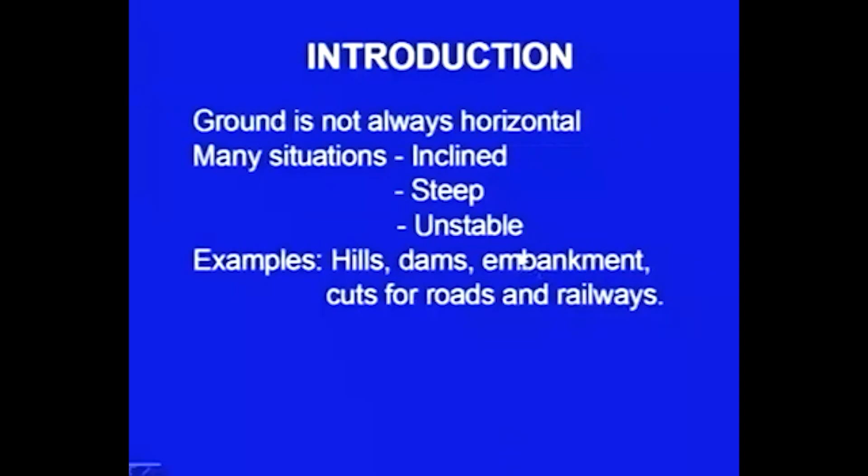We start with the classification. So, as far as the classification is concerned, all the slopes can be categorized into two major categories. One belonging to mining engineering and second one is civil engineering. We shall be concentrating more on civil engineering aspects, but to have some idea to differentiate between mining engineering slopes and civil engineering slopes, some discussion I am going to give here.

You might have seen in case of the mines, there are open cast mines. What we do there is we extract the ore. The ore is extracted by excavating the ground. So, ground is required to have certain slopes there, and you will watch that you can have very steep slopes. And another thing about the mining engineering slopes is they are very large in extent. So, there is a basic difference.

The basic difference between civil engineering and mining engineering slopes is that here our purpose is not to make the slope stable as such. We are extracting the ore and we shall be keeping the slope stable for that much time for which we will be extracting the ore. So, our main purpose is to extract the ore. It's not our purpose that we keep it safe for certain structures. For example, in case of civil engineering structures, we have to keep the slope stable for a very long period.

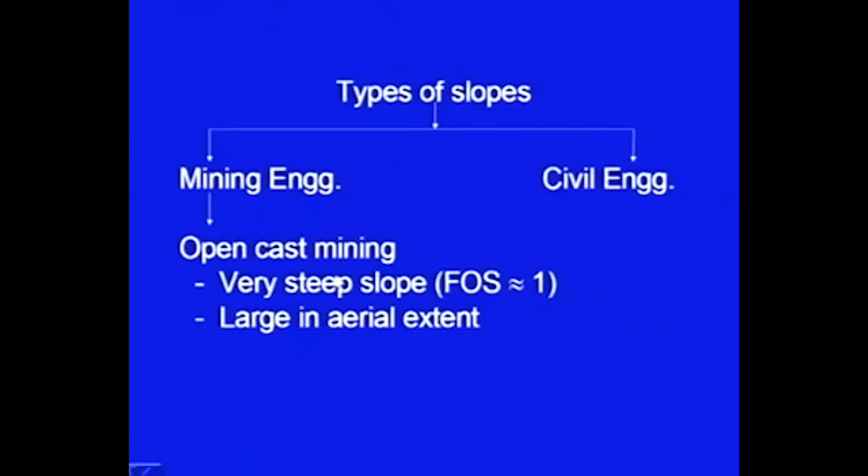So, this is a mining slope, and you can see the area, because you have to extract a large amount of the ore, the area generally is very large, whereas in case of civil engineering structures the area generally is small. Coming to civil engineering slopes, as I told you, the margin we keep very high. So, factor of safety is 1.4 to about 2.0. We shall be discussing what factor of safety is. Presently, you can think that it is a sort of confidence, how much margin for safety we are taking.

Now, civil engineering slopes I am dividing further into three categories. First is based on process of development, second one is based on composition, and third one is based on its extent. The first one is based on process of development. This means how the slope has come into existence, whether it was a man-made structure or a natural kind of structure. So, therefore, again it is divided into two categories.

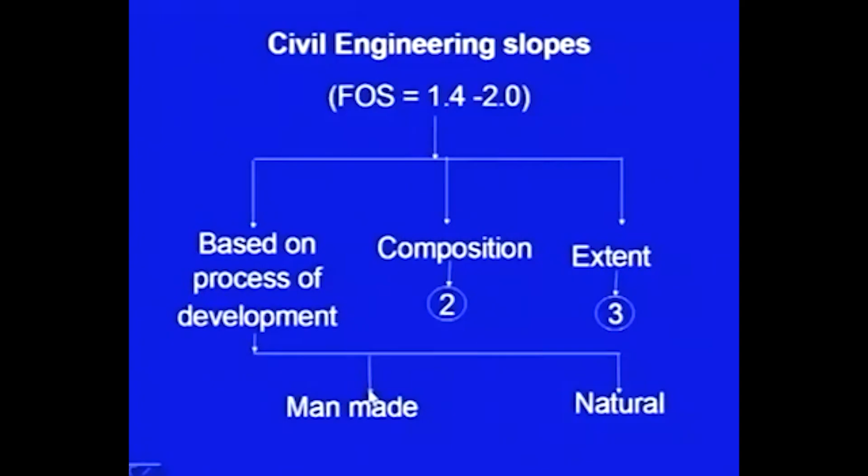Here are some of the examples of man-made slopes and natural slopes. First one is, to give you the idea, cuttings and embankments for highways and railroads. Cuttings means you are cutting the soil.

You might have seen for highways, for example national highways, which are very important highways, and for railroads, when they pass through an area which is near to a river, the highway is kept at a little bit higher level. The idea is we try to keep it above high flood level, so that during the floods also these highways are not blocked.

So, to do that, we have to make some sort of embankments, and on that embankment the highway is placed. This embankment is constructed of soils or rocks or both of them, and the stability of this embankment is very important. So, there are the embankments.

Secondly, cuttings are there wherever the ground is undulating and the road or railway track is passing through that. In fact, in case of the railway tracks, you have to have a very gentle gradient. You cannot have very steep gradients on the railway tracks. So, where the ground is uneven, you have to make the track on a smooth surface.

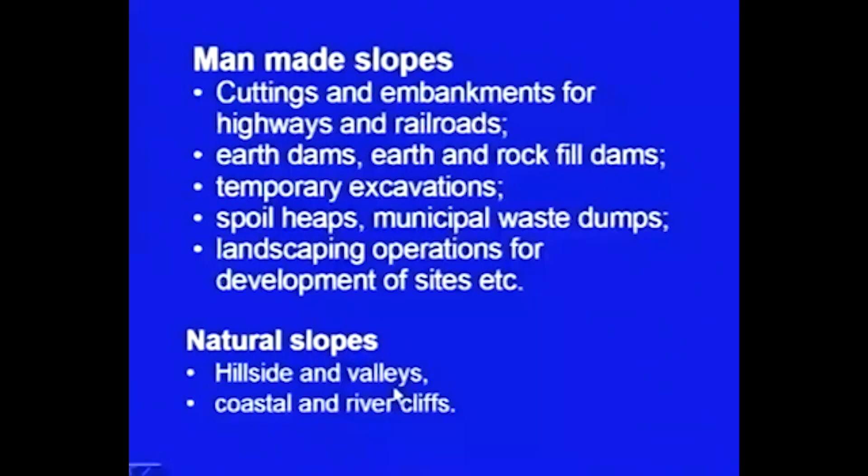Here are some examples I am giving. For example, this is a road cut in hillside. This was the natural ground. You can see I have drawn a small dotted black line. This was the natural ground level. It was going like this. So, in itself what was the stability of this hill slope, that is another question. But above that, now we have done this cutting.

We have constructed a road here, and now you can see we have removed this particular material from the side. So, actually this soil mass or the rock mass was being supported by the material which we have excavated. So, there will be a tendency of this particular geological media, whether it is a soil or rock, to try to slide to this direction because of the gravity.

There you can see some measures have been taken here. A retaining wall has been constructed. Retaining wall is one of the ways using which the slopes are stabilized. So, the idea is that here it is now left unsupported. It was being supported by the soil mass here, now it is unsupported. So, it will try to move here. So, this particular problem you have to analyze using mechanics of slope stability.

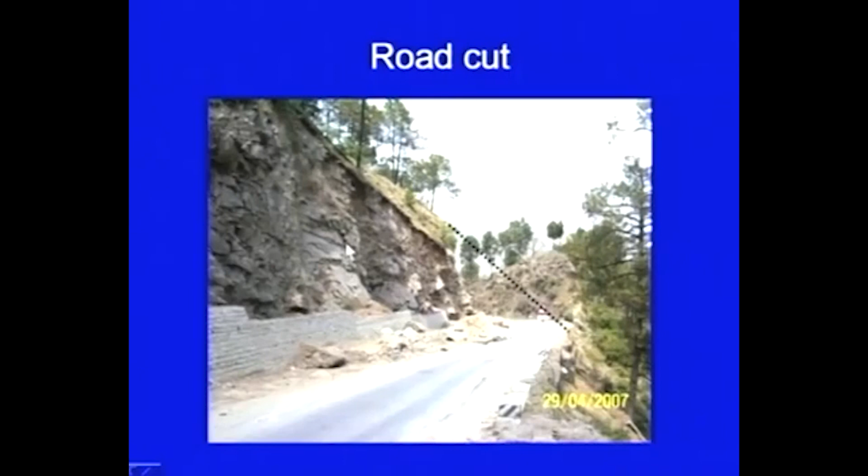Here is another example of a man-made structure. It is a dam here, you can see it. This is the downstream side of an earth and rock fill dam. Upstream side is above that. Water will be stored on the upstream side. A reservoir will be formed there, and water will be exerting pressure on this dam. It will be seeping through it, and the seepage pressure will also be acting on the dam body, inside the dam body. So, here the stability of this particular structure is our concern.

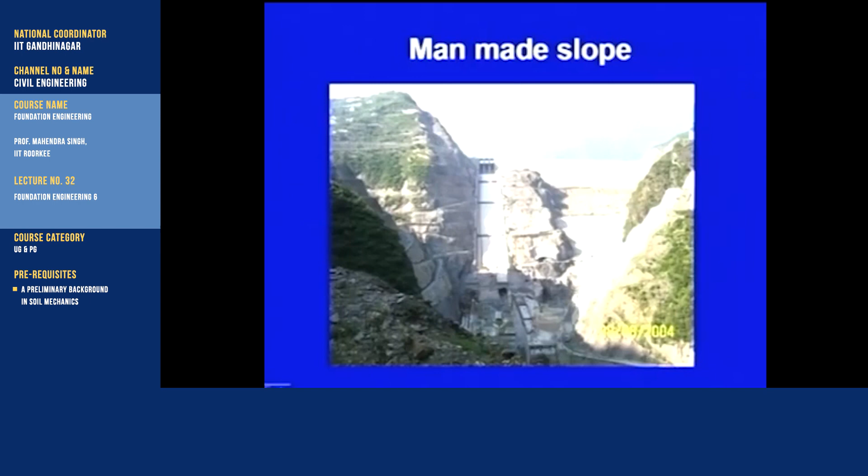Secondly, it is not only the man-made structure, but you can see here these are the steep banks which have been cut. Again, they are man-made plus natural. So, you can have a problem which is having man-made plus natural slopes both. So, here you can see the natural slopes are there, and there are very steep cuts in the rock mass here, steep cut on this side. So, stability, whether it is stable or not, whether it is failing, what is the margin of safety, that is the point of concern.

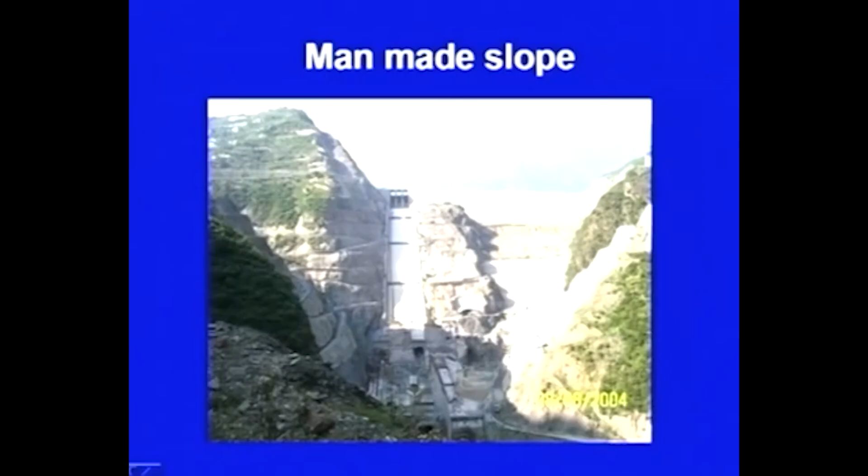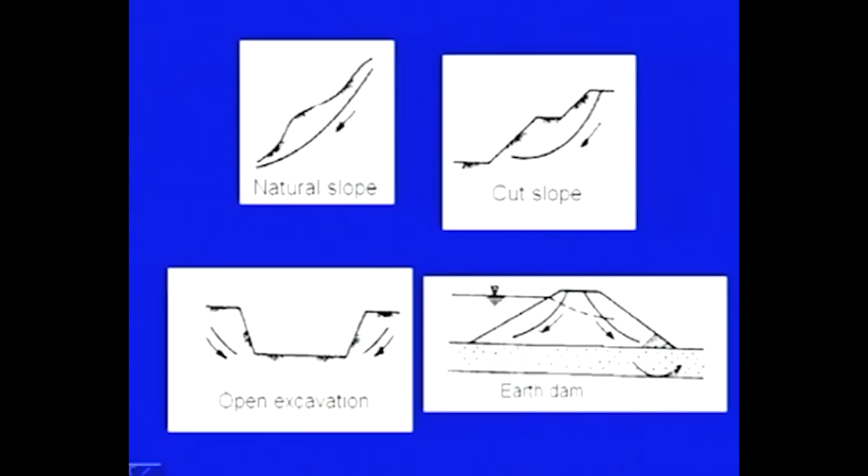So that was the first category of the slopes. Now, the second category of civil engineering slopes is based on composition, and here I divide them into three parts. There may be a slope composed of soils only, there may be a slope composed of rocks only, this particular course will be mainly concerned with soils, or there can be a combination of both. For example, in case of landslide problems, it is not enough that you know soil mechanics, you have to know the principles of rock engineering also.

Coming to soil slopes, where we are concentrating more, the material can be only clay. For example, when we construct slopes in case of embankments etc., you can have only clay. The section which we are analyzing may be only clay, or it may be sand, or in general for embankments it will be a combined situation. So from theoretical analysis point of view, we have to know each of them, and practically for embankments most of the time you will be having a combination.

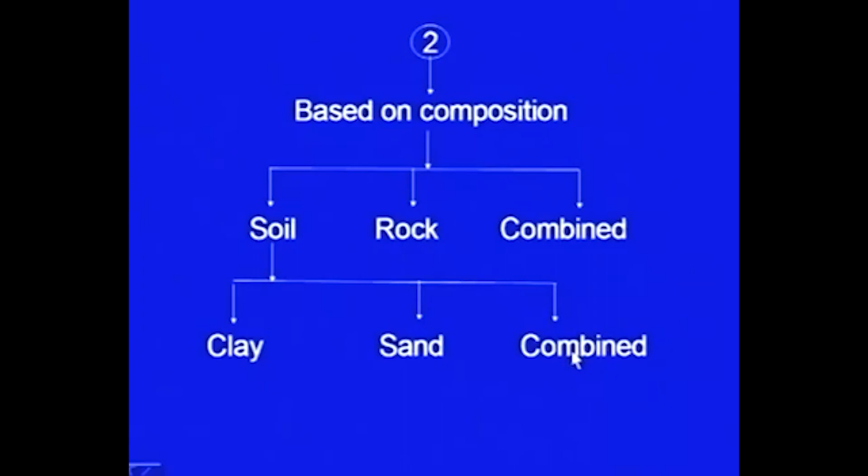The third category of classification is extent. Based on extent, they are divided into two categories: infinite slopes, meaning the extent is very large, and finite slopes, meaning the extent is small. So infinite slopes are, for example, the hills, which are having very large extent, so we can consider them to be infinite for theoretical analysis. Examples like embankments have smaller extent, and we will be considering them as finite slopes.

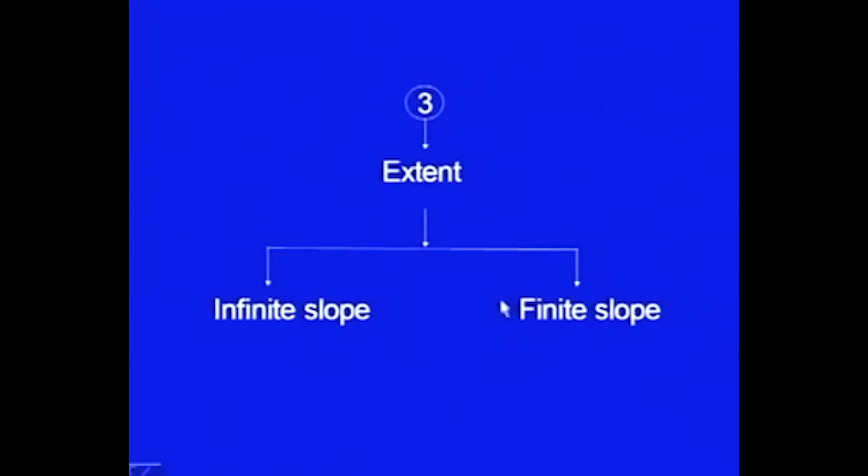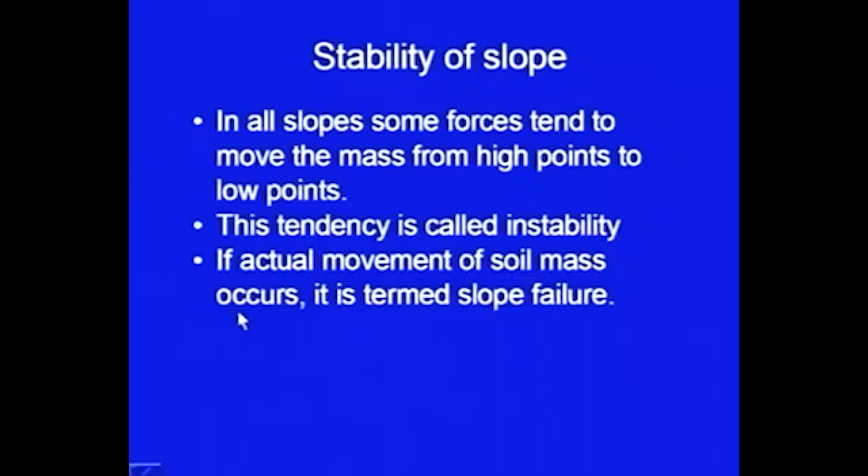Now, after having the idea what is the slope and what are the different kinds and classifications, let me come to the point of what exactly we are going to do, what this stability of slope term means. Now, in all slopes, some forces tend to move the mass from high point to low point. It is very natural, as a student of mechanics you know, because of gravity, if there is a soil mass at a higher level and another at a lower level, then there are some actuating forces. Because of gravity, there will be a component of gravity forces that will try to move the mass from the higher points to the lower points. This tendency is called instability. So it is trying to be unstable, and if actual movement of the soil mass occurs, then this is called slope failure.

Let me try to explain the stability, how we look at stability. It is a simple example, not from the slopes, but to make it clear, I have taken a simple mechanics problem which you have solved in your intermediate classes. It is an inclined surface having some roughness, represented by friction coefficient mu.

There is a block kept over this surface. This inclined surface makes some inclination psi with the horizontal, and the interface between the block and this plane has no cohesion, only a frictional component, that is mu. You have solved these kinds of problems in your intermediate classes.

The weight of the body is known, and it acts in the downward direction. I can resolve this weight into two components: one acting normal to the plane, and the second acting tangential to the plane. If this angle is psi, the normal component comes out to be W cos psi, and the tangential component comes out to be W sin psi.

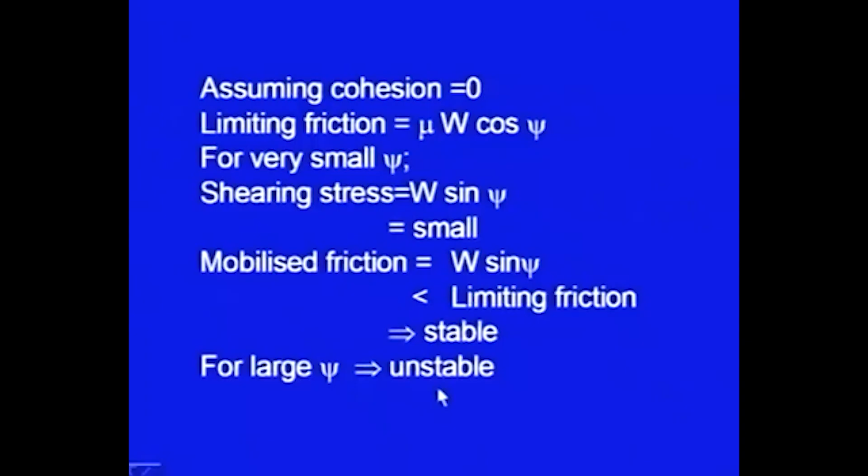Let me finally summarize the conclusion. If psi is small, it will be stable, because the mobilized friction equals the actuating force. As you increase the angle psi, the actuating destabilizing force goes on increasing, and the mobilized friction also goes on increasing.

At a certain value of psi, W sin psi becomes equal to the limiting value of mobilized friction, mu into R. Beyond that, if the slope is steeper, W sin psi becomes very large and the block will slide. This is the basic principle used in stability analysis: we compute the mobilized value of shearing resistance, the limiting value of shearing resistance, and based on that find the margin of safety.

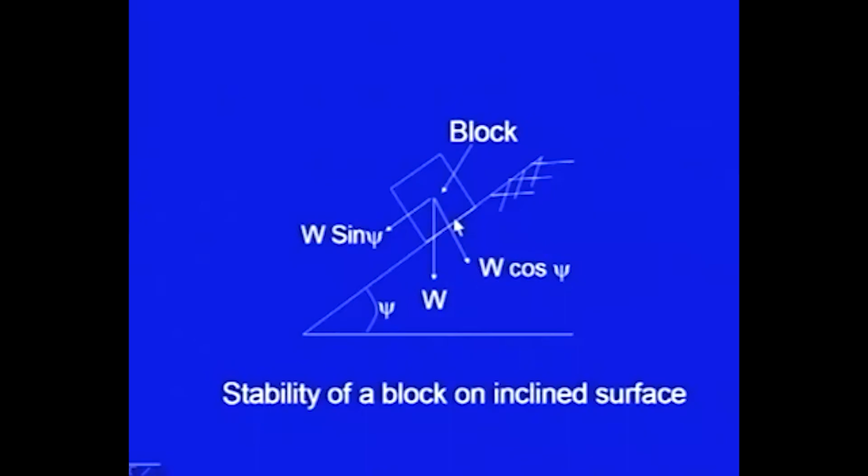There are certain important factors which govern this instability. Let me discuss them one by one. These factors are gravitational force. You saw just now that W was coming into picture, W sin psi was coming into picture, so this was causing instability. The gravitational force is going to cause instability. Its one component is going to cause instability, another component is going to enhance the stability. So we have to see that relationship.

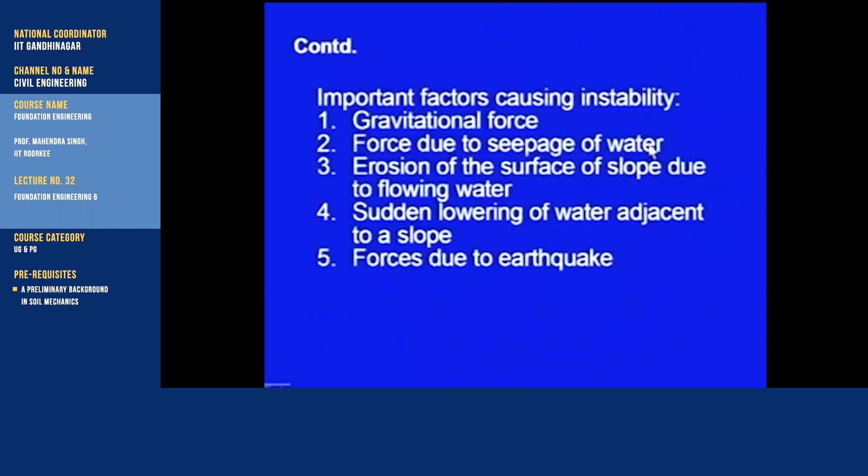Then there are other things I did not discuss. Force due to seepage of water. If the water is seeping through the soil mass, then there are additional forces which will come into picture. Then there may be erosion of the surface of slope due to flowing water. The erosion of the surface will have effect on the gravitational forces. It can reduce the gravitational force, but the water itself can have seeping effect. So these are the things which have to be considered. Then sudden lowering of water adjacent to a slope can cause instability, and also there are forces due to earthquake which can cause instability.

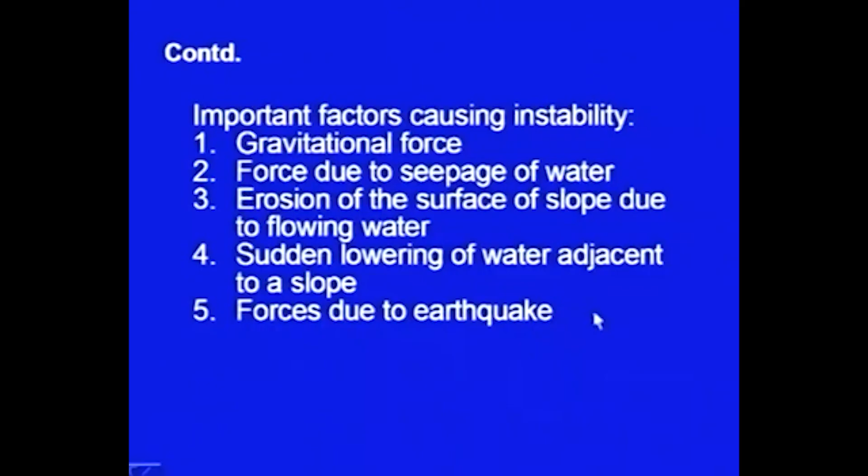This is the first force, gravitational force. Here I have taken an example of an infinite slope. It is a hard stratum, firm stratum available at certain depth. It happens in case of the infinite slopes. In case of the hills, generally the firm stratum will be available at certain depth. And here it is the ground surface, and this entire mass, if you look, the failure generally has been observed that it occurs like this.

So this particular entire mass is trying to slide over this hard stratum. It is a problem similar to what I discussed, a block. You can consider this mass to be a block, and the weight of this block, the component of weight of this block, this component is trying to destabilize it. So this is the gravitational force, how the gravitational force comes into picture. This is the importance of that.

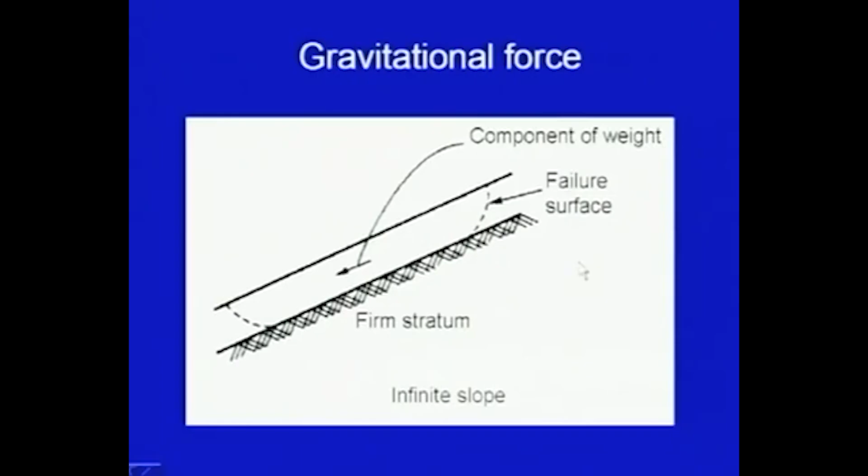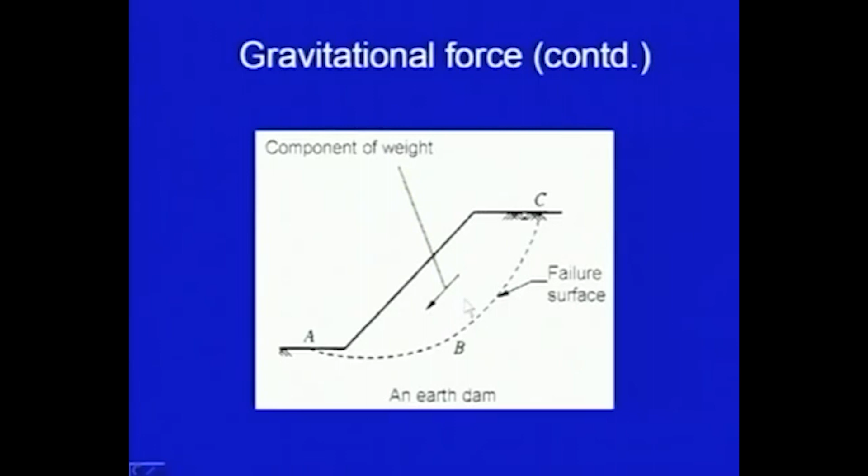Now here is another example of the gravitational force. Here I am taking an earth dam, and its section is drawn here. In this man-made structure, the failure surface generally has been observed to be a curved surface. Most of the time it is taken as a circle, and this mass tries to slip in this direction. So again if you look at the weight of this particular body, the weight will be acting in the downward direction. One component is acting parallel to this failure surface, another component will be acting perpendicular to the failure surface. So as a whole, if we take this body, you can see the component of weight is trying to destabilize, trying to create instability in the slope.

These are the examples. This is the example of seepage force. Here it is a low lying area, and groundwater table is here. This is the ground surface, and seepage is taking place. So when the water table comes, the groundwater table touches the ground here. So this entire area is completely saturated, and seepage is taking place in this direction, and seepage is almost parallel to the slope. So these situations have to be analyzed in a different manner, and here this seepage joins the water table. So we will be considering these details, how to take into account the seepage forces.

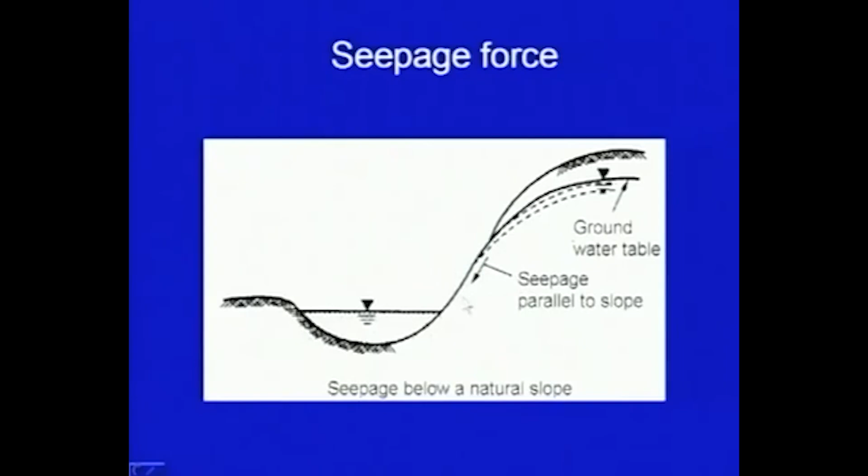Here is a problem which is quite common in case of dams, earthen dams. It is called the sudden drawdown problem. There was an embankment here, and there was this water table. This water table was there for a long period, so the system was in equilibrium, and seepage was taking place from this side to the downstream side. You can draw the flow net and get an idea of the seepage.

Now, all of a sudden there is a lowering of water level, so from here the water level goes down to this place. What happens to this saturated soil mass which was in equilibrium, being exerted force due to seepage and force due to water? Water was providing a stabilizing force over this soil mass, and it was under equilibrium. All of a sudden this pressure due to water has been removed, but the soil is completely saturated, water is still present there. So there is a flow which starts from the soil mass towards this side, and instability is created because of sudden lowering of water level. This is called the sudden drawdown condition.

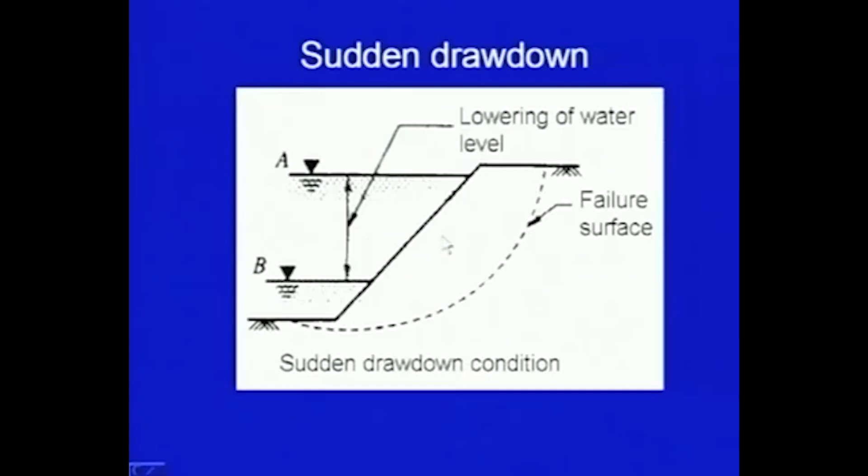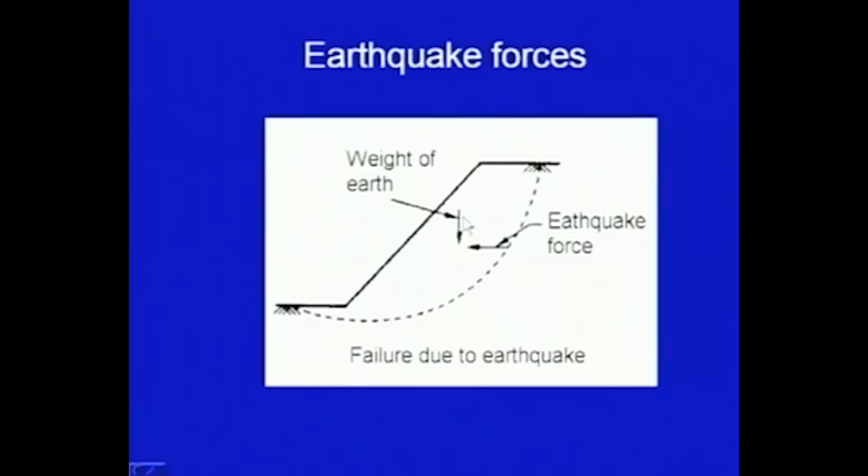Earthquake forces cause severe shaking of the soil mass. Here is an embankment, its weight is acting in this direction, and the earthquake forces cause shaking. The earthquake forces can be resolved into two components: a horizontal component and a vertical component. When there is acceleration in a given direction, the force due to earthquake acts on this soil body in that direction. What this does is decrease the effect of normal stress, decrease the stabilizing forces, and in other words, increase instability.

Now let me come to the basic mechanism. We have discussed what a stability problem is. The actuating forces induce shearing stresses throughout the soil mass. There are certain actuating forces, the most common being gravity, and those actuating forces induce shearing stresses throughout the soil mass. Now we will be talking in terms of shearing stresses, there is some stress which is being applied.

Unless the shearing resistance on every possible failure surface within the soil mass is larger than the shearing stress, failure will occur in the form of mass movement of soil along a slip surface. So the actuating forces create shear stresses, and these shear stresses have to be resisted by the shearing strength of the material. There can be an infinite number of possible potential failure surfaces. On all these potential failure surfaces, if the slope is stable, that means the resistance offered by the soil in terms of shear strength is larger than the actuating shearing stresses.

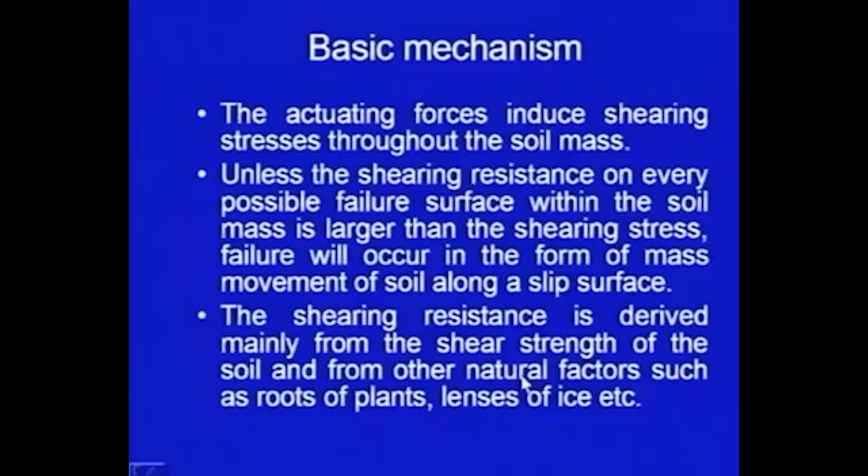This shearing resistance is derived mainly from the shear strength of the soil, which resists the applied shear stresses. Some help is also available from other natural factors, for example roots of plants or lenses of ice. In fact, plantation of roots is a very effective measure in case of natural slopes, because the roots of plants add to the shear strength of the soil mass and oppose the actuating shearing stresses. So the basic mechanism is this: there are actuating shear stresses, and those actuating shear stresses have to be resisted by certain resistance.

We shall be using the limit equilibrium method in this analysis in this course, and this method assumes that failure is on the verge of occurring along an assumed or known failure surface. As mentioned, there are infinite possible potential failure surfaces, so in this method we assume a particular failure surface. It may be a planar surface or a curvilinear surface. Then, second, the shearing resistance required to maintain equilibrium is compared with the available shearing strength of the soil.

So in this method, first we take a failure surface, and on that failure surface we find out the shearing stresses. Once the shearing stresses are known, we can find out the required shearing strength, which will be equal to the applied shearing stresses. This required shearing strength is then compared with the available shearing strength, meaning the maximum value that particular soil mass can offer.

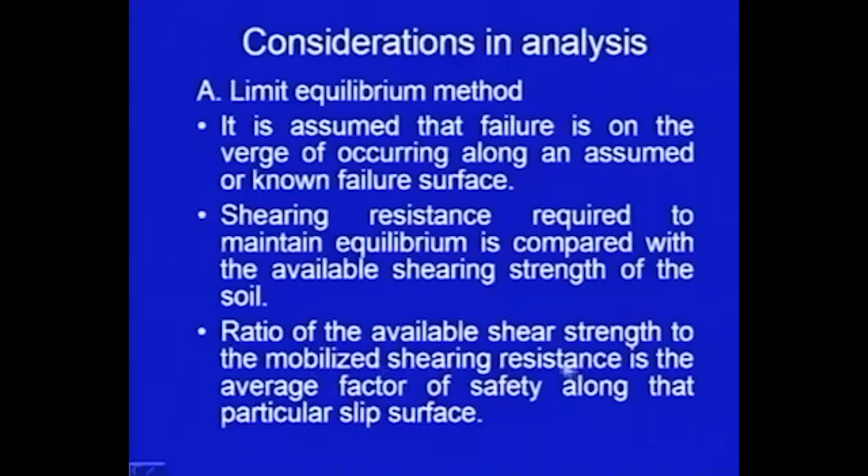Coming to the shear strength parameters, all the stability analysis you are going to do now will be very sensitive to these parameters. These parameters are very important. There are two shear strength parameters which we use. These you know: the first is called cohesion and the second one is called angle of internal friction, or angle of shearing resistance. How we get it, you have already studied in your soil mechanics course.

We do some triaxial tests. From the triaxial test we get data between confining stress and major principal stress at failure. From those data we plot the Mohr circles. So these are the Mohr circles. From these Mohr circles we then plot a common tangent. This represents the failure envelope, and the significance of this failure envelope is it tells you the relationship between the normal stress and the shear strength at failure. So for any given normal stress you can calculate the shear strength.

Here we are using a straight line variation, so it will be an equation between c dash and phi dash. So y is equal to mx plus c, that is the form of equation. So tau will be equal to m becomes tan phi into x becomes sigma, and c dash is the intercept.

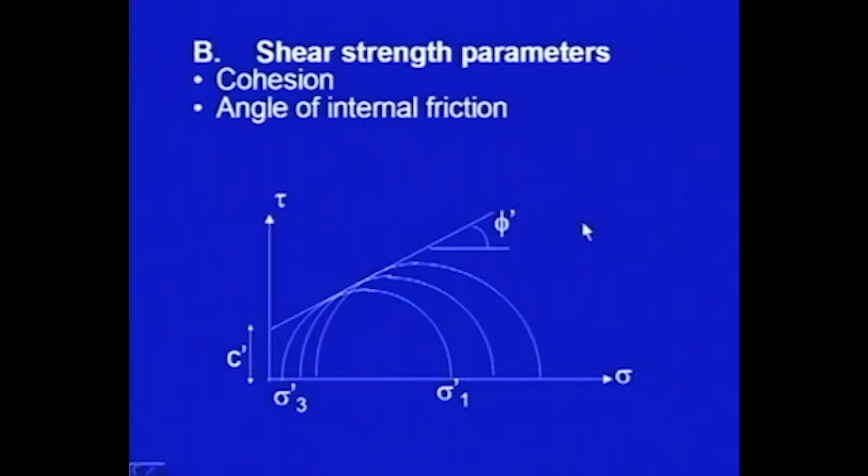They are very important: cohesion and angle of internal friction. These are the important parameters, and some discussion about these parameters is necessary. First point about these parameters is it is not easy to determine them, though we take it for granted. Sometimes we do the test and we take the c and phi values, but it is very difficult to determine these parameters in the sense that the representative value, what is that value which is actually applicable in the field, it is difficult. You have to decide whether to use undrained or drained shear strength.

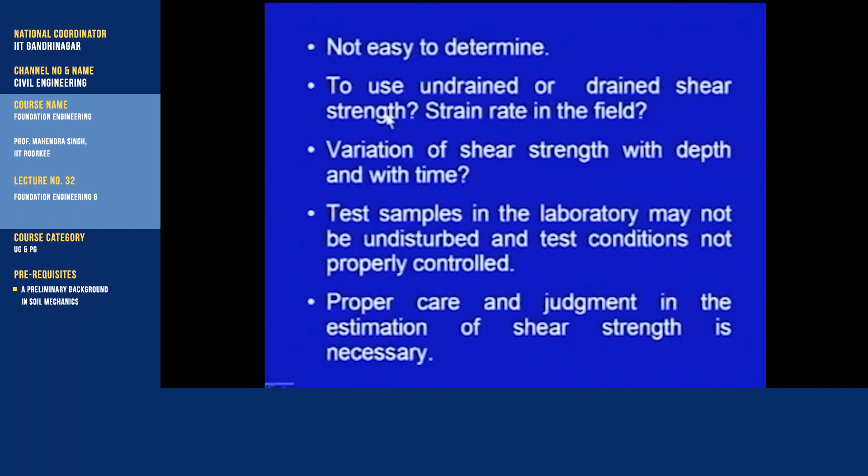We will be discussing this point later on also. Undrained and drained conditions depend on the strain rate, the rate of strain at which failure occurs, and what is the permeability of the soil. If the permeability is very large, for example if it is a sandy soil, you can treat it to be drained, you can use the drained shear strength parameters. But if it is clay soil, or even silty soil, then the rate of strain compared to the rate of dissipation of pore water pressure becomes very important. So drained and undrained conditions are complex phenomena, and we have to give reasonable solutions; we have to think in terms of these things.

Then, variation of shear strength with depth and time. In most of the analysis which we will be discussing, we will be taking these shear strength parameters to be constant throughout the soil mass. We will be treating the soil mass to be homogeneous as well as isotropic. Homogeneous means the properties are the same at different points, and isotropic means properties are the same in different directions. So, these conditions are not actually true for real field conditions.

In the field, you will find that as the depth increases, the soil becomes more and more stronger. So, those points, if possible, should be considered. Then the next point is we take these parameters from laboratory tests, and laboratory tests are supposed to be on undisturbed samples, and also the test conditions which you simulate in the laboratory should be properly controlled, and they should represent the field situation.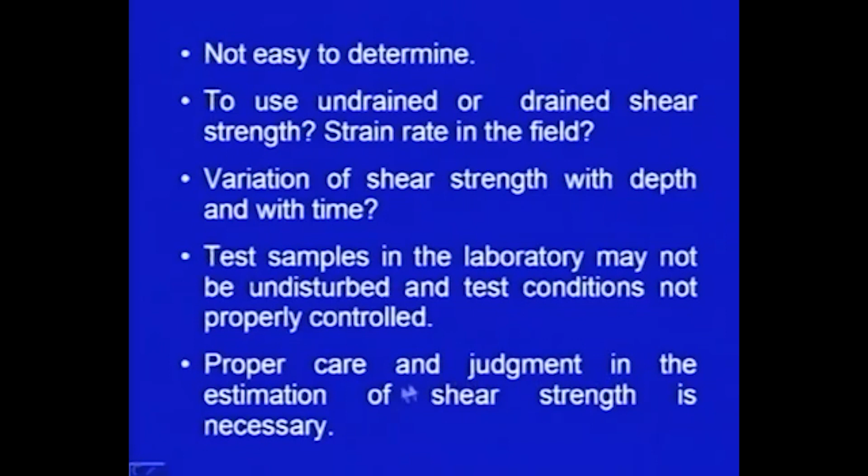The next point which you will have to answer is whether we should use maximum shear strength or the ultimate shear strength. You will find that it happens in case of clays especially, that as the shearing strain increases, the soil loses its strength. If you draw stress-strain curves, as the shearing strain goes on increasing, the strength goes on decreasing.

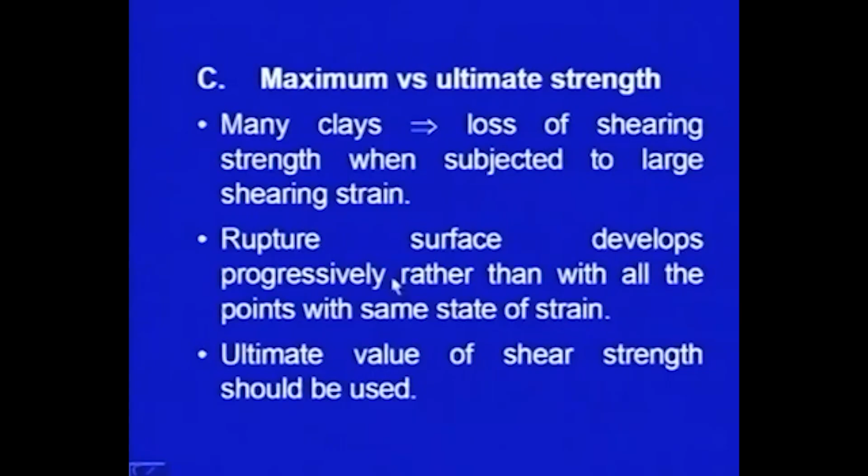And in the field, it has been observed that the rupture surface does not develop in one go. It is a progressive phenomenon. The same strain does not develop at all the points, but it develops progressively. So, the rupture surface develops progressively rather than with all the points at the same state of strain. And it happens in case of clays, especially overconsolidated clays. So, it is preferred that the ultimate value, at a very large strain, should be used instead of the maximum value in the analysis.

The next point which we will be discussing is the plane strain condition. In the whole analysis which we are going to do, most of the times we will be using a two-dimensional analysis. It is called the plane strain condition. Plane strain means all the strains are occurring in one plane. Out of plane strains and deformations are ignored. So, these 2D formulations are applicable, and it is true for any other structure, for foundations also, only if the length of the structure is quite large compared to the cross section.

The length means the dimension of the slope perpendicular to the plane of paper. So, if that dimension is very large, then you can assume that plane strain condition will be applicable. Otherwise, you have to do 3-dimensional analysis. So, keep in mind that all these analyses we are doing in 2 dimensions. That means, in 3 dimensions, the same geometry of the section is continuing for a large distance. And in the analysis we consider unit thickness, ignoring the strain in the perpendicular direction.

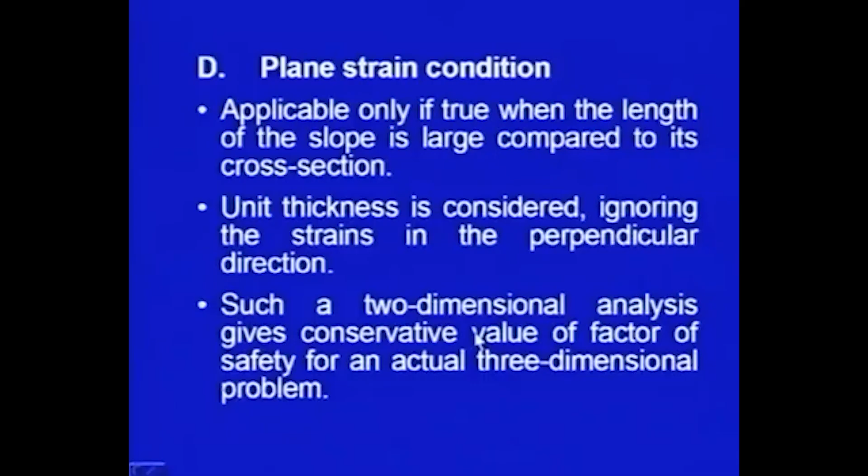Today we have started the introduction of slopes. We talked about the different types of slopes, and gave examples of different man-made and natural slopes. After classification, we started discussing the mechanics, how mechanically we are going to tackle the problem of stability of slopes, and then we discussed some considerations about the shear strength parameters and other problems. We shall continue with these considerations in the next lecture, and then we will go to the actual analysis of the slopes.